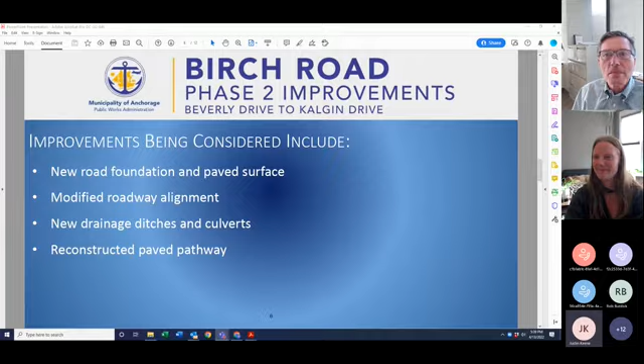So at this point, I'm going to pass it off to Justin. Oh no, I'm going to pass it off to Brian. Sorry about that, Brian's next. Thank you, I knew what you meant.

I am Brian Heffler, and for those of you who may have just joined a little bit late, I am the chair of the Mountain Park Robin Hill Rural Road Service Area Board of Supervisors. I'm going to share my screen here right now. Hopefully you can see that. I have a little presentation put together with the background and context, as Holly mentioned a minute ago. We are a 5-member board.

I myself have been on the board for over 25 years. I'm not even sure how long, but it's been quite a while that I've been involved with the board. The other members are Eric Emerton, who is on the phone this evening, Colin Leary, who may be on the phone (he was traveling), and Tom Bassler. We do have one vacancy right now, but we do have a 5-member board.

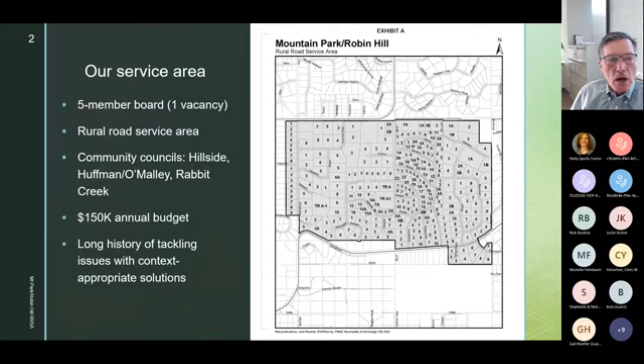A couple of things I'd like to point out. First of all, we are a rural road service area, not a limited road service area. The difference is a limited road service area is limited to maintenance only, while a rural road service area is able to do construction projects such as we're talking about here. So that's a really important distinction.

You can see Birch Road, right smack dab in the middle of our road service area. I suspect a lot of you have seen this figure before; that is what our service area looks like. We have about 7 miles of road. Interestingly, Birch Road itself splits us between the Hillside Community Council to the east, on the right, and the Huffman O'Malley Community Council to the west, on the left. We also have a little appendage below DeArmond Road, in the Rabbit Creek Community Council area. So we're really in 3 different community councils, but primarily for this particular project it would be Hillside and Huffman O'Malley. Our annual budget is about $150,000.

I might point out as well that we are also an aspect of the Municipality of Anchorage. Everybody on the board is an elected official. If you voted in the election last week, you may have seen Colin Leary was up for election again, and he was voted in as a road board member. We are sworn in, and we are officials of the Municipality of Anchorage. We're like the assembly in that we're politicians who are voted in, but we're also a little bit like the administration in that we have operational responsibilities administering our $150,000 budget to provide services in our area. So we're a bit of a hybrid between those two functions.

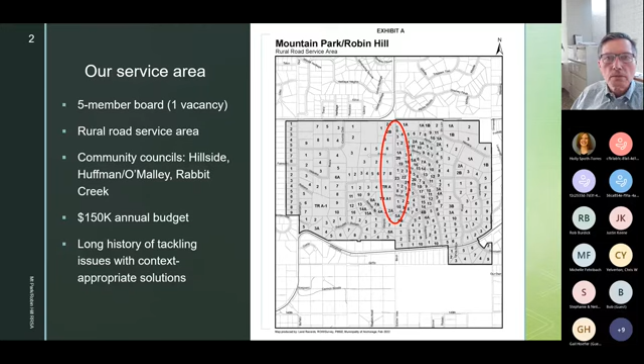We do have a long history here of working on these issues. I mentioned I've been involved for over 25 years, and we look for what I coined as context-appropriate solutions for the sort of things we have to deal with. As everybody knows from this time of year, there's a lot of potholing and runoff all over the place, and it's a real challenge with our roads trying to deal with everything we have going on right now.

So, Birch Road. This is what we're coining the current project, the Phase 2 improvements. You may recall, if you've been around for a while, we did Phase 1 improvements a number of years ago on the northern section. I don't have a perfect picture of it here, but I do have a cover page from the bid specs from back then, June 2012, when we went to construction. That was from Huffman Road on the north down to Beverly Drive, or really kind of Penny Circle right there, about 1,200 feet of roadway that we reconstructed at that point.

It was a long process from when we began planning to when we had shovels in the dirt starting construction. We began in 2005, and construction began in 2012, dribbling over into 2013. It was a pretty big undertaking on our behalf. The total cost, to my shock, was about $1 million.

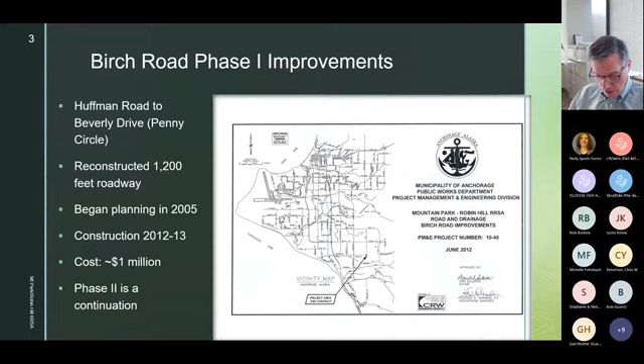There were all kinds of issues we had to deal with that we were finding out about as we went through the studies, and the engineering team helped us work through the design challenges. I recall one of our former board members driving down that road after it was done, and he said, 'Man, this feels like a million dollars.' And sure enough, for good reason, it was a million dollars.

Phase 2 is what we view as a continuation of the phase 1 work. There you see it, and we'll have a better close-up of this figure later on when Justin from CRW does his discussion.

You can see the big picture: Beverly Drive on the north, down to Kalgin, Naknek on the south, along Birch Road. The red line is just a box to show you where the project is—that doesn't mean anything more than that. The black lines are the property lines, and you can see how the road kind of meanders back and forth a little bit. Justin will talk about this more, but we don't always stay perfectly in the right of way, although we're not too bad, as you can see from that figure.

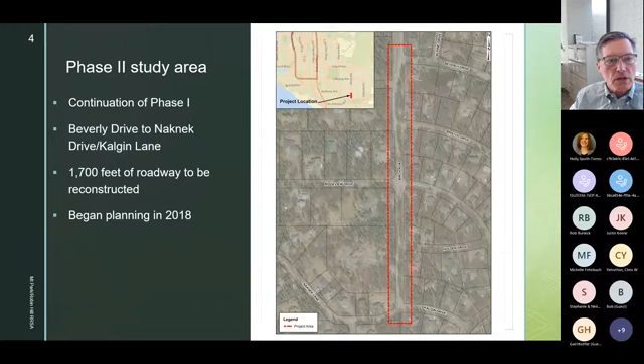So this is a continuation of phase 1, down to Naknek, Kalgin, about 1,700 feet of roadway—something like 40% longer than the phase 1 improvements. We began scratching our heads and thinking about this back in 2018, knowing one of these days we'd need to take a close look at how to fix the lower part of Birch Road.

So what was the purpose and need as we looked at that section of road—what did we want to accomplish, or what needed to be accomplished? Better road conditions and traffic flow. We get a lot of complaints about that section of road; it's difficult to navigate, it's hard on your vehicles, there's a lot of wear and tear, and generally it needs improving for driving through that section.

Driving safety is a huge part of that—sight distances, passing lanes, and the like, just having a safer drive through there. Interestingly, we don't get too many recorded accidents there because I think everybody really has to slow down as they're going through. There have been a couple reported over the years that I'm aware of, but making it a safer drive through there is important.

Emergency vehicle access matters too. Unfortunately, and really tragically, we had a house fire over in my neck of the woods last fall—the roads are in a little better condition over there. At one point, ten different fire trucks and other emergency vehicles responded to that house fire. If that had been on Birch Road, I don't know what they would have done, because it's almost impassable for big vehicles like that, let alone having them stacked up and able to respond to a fire in that area. I worry about that, and about having better access for fire trucks, ambulances, and the like.

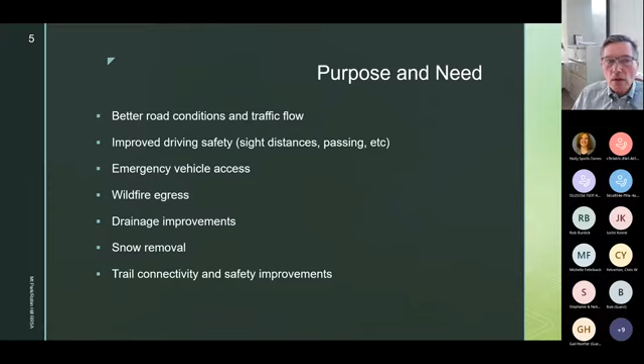And then really last but certainly not least is trail connectivity and safety improvements for the trail. The bike trail along there is worn out really, it's not in the best of shape. The road crossings are really suboptimal. And while we're working on the road, we should be able to work on the trail as well. So that was when we were coming up with a list of what we really wanted to accomplish in here. That was what we came up with.

So what have we done so far? If we've been working on this since 2018, what have we done? The first thing we did was a little drainage evaluation in the low spot.

We thought, well, why don't we have a little bit of money for an engineering study, why don't we take a look at that low point and try and figure out what we can do with the water down there. Turns out when we started looking into that issue, CRW was our engineering firm at that time. Actually, they have been all the way through. And we really quickly realized that we needed a more holistic approach on Birch Road from where the phase 1 improvements ended at Beverly all the way down to Naknek, and look at a corridor rather than just a little block section of Birch Road.

It really had to all tie together, due to, you saw earlier how the road just kind of meanders and so forth. How are we going to design that all together?

So we commissioned a so-called design study memorandum. You can see that was completed, at least as a draft, in June of 2020. For those of us who aren't in the business, I call this 35% design. That's how I think of it, is doing that initial work to look at that whole corridor, look at options, look at what the big design challenges really are. And that was what CRW did in that particular study.

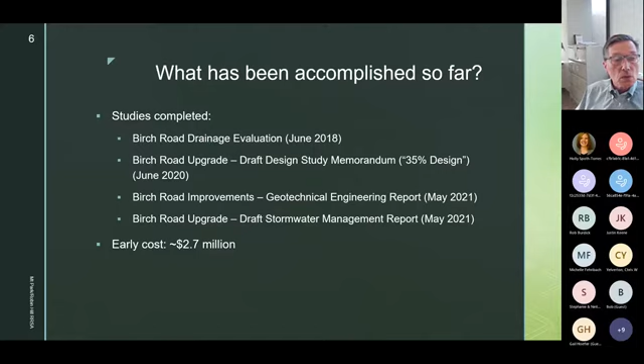The early cost we came up with was about $2.7 million. Again, a little bit of a shocker. It's like, how is that possible for 1,700 feet of road to be on that order of magnitude? And I really kind of questioned that cost and dug into it.

So what again, me as a layman, the road board guy, what I really came up with is the big drivers on the cost. First of all, the road is not constructed to modern standards. The lane width isn't proper. You can hardly even pass in the winter time down there in some sections of Birch. Sight distances, you really can't see very well.

The ditching isn't right, et cetera. Interestingly enough, as we dove into this, one of the things we realized is that our choices really are, and it may not be quite this black and white, but I'll portray it that way: either do nothing or build a modern road to current standards as required by the municipality. There's really not any gradations in between. So either we do it all or we do nothing is the impression I've been left with.

From the municipality of Anchorage, is there a little bit of wiggle room on the do-everything end of it? Yeah, there probably is, but what we need to do is make our case, like if we can't quite get the right ditching along this section of road, what kind of variance can we get. But the onus is on us to prove that we can't do it.

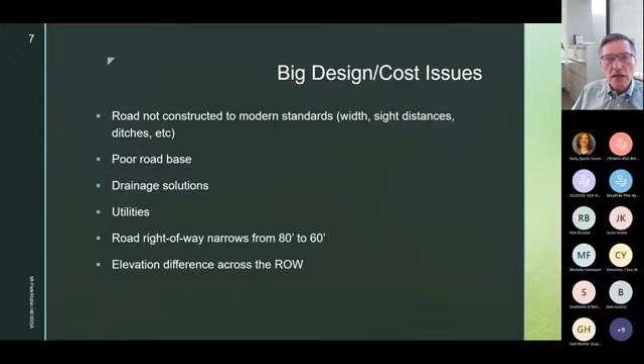The last thing on this list is elevation difference across the right of way. What I mean is we have to tie in all the roads—Bristol, Ridgeview, Holden, and so forth—and all the driveways up and down there into Birch Road. That is a driver of cost because it determines where we can put the elevation of the road. So lots of big issues to be dealt with.

Rob mentioned earlier, he's the design guy, so he's digging into all these details with the team there at CRW, trying to come up with a good solution for all of these things.

So, way forward, here we are today. We wanted to reach out—we thought it was a good time to talk to people and bring them up to speed on what we have so far. We are advancing from the 35% level up to the 65% design. We're working through all these issues, refining the cost estimate, and trying to come up with solutions to all of those various things we need to do.

Once we've worked through those issues and have a plan, we hope to come back out for another session like this, talk to people, get it out on the website, and let people noodle on it, think about it, and give us feedback on all those things. The next phase after 65% is to get to 95%, which is really preparing for construction and getting close on all the bid specs. We do need to seek construction funding—that is not part of what CRW is doing.

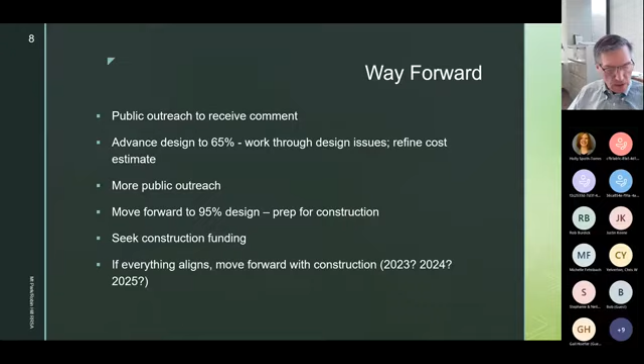We're looking for construction funding. In parallel, if everything aligns and we get through all the design issues and find the funding, I can't really rule out construction in 2023, although that seems highly unlikely. More likely it would be 2024 or 2025 before we could get to construction. All that remains to be seen based on what we still need to do.

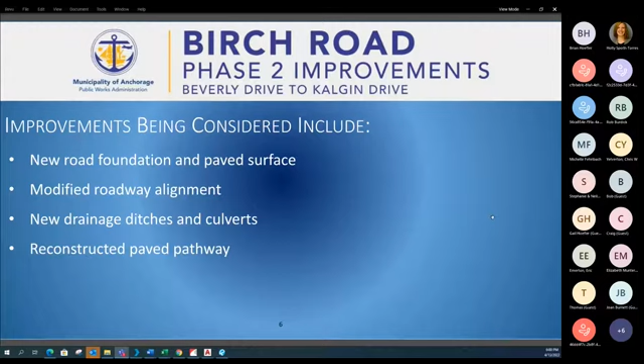The improvements being considered to meet the goals of the project include a new road foundation and paved surface. The next item is a modified roadway alignment. The existing roadway is not well situated all along the corridor, so the modified alignment would help us better utilize the existing right-of-way and trail and walkway easement. This is the big one: new drainage ditches and culverts, and a reconstructed paved pathway.

On to the next slide. This is an overall view of the entire corridor, and I'm going to zoom in a little bit. As Brian noted, we've been working on this for quite some time. An additional item we've completed is a full topographic survey and right-of-way survey.

What's being shown here is a detailed topographic base map and right-of-way base map. As Holly mentioned, we'll be posting this presentation online so you'll be able to take a look at it in more detail. Don't feel overwhelmed as I go through this quickly - you'll have the ability at your own time to check this out in more detail, zoom in, look at these features, and ask us questions later.

We also have, off to the right, an existing legend that spells out all the existing features shown here. The project, as Brian noted, is going to start south of Beverly Drive. This is where the last phase of the project, the construction, stopped near Beverly Drive - we installed this existing cross culvert.

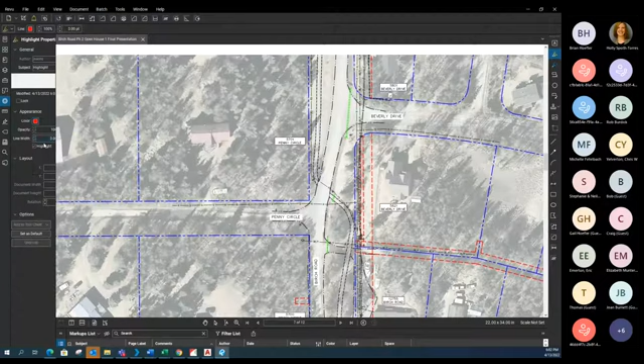I'm going to pull up a markup tool here and highlight a couple things as we go. This green dash line is the existing culvert. These circled dash lines are the existing gravel edge of roadway.

We've got the existing paved pathway here. Like Brian was saying, there are all sorts of utilities: underground fiber optic, underground gas, overhead electric and telephone, and underground cable. As part of our survey effort, we've mapped all these features, so we have a good idea of what we're up against for designing these improvements.

The blue line is the property line and right-of-way lines. The red dash lines are the existing easements. That's a summary of some of the existing features - I probably didn't go over all of them, but we'll move along from north to south now.

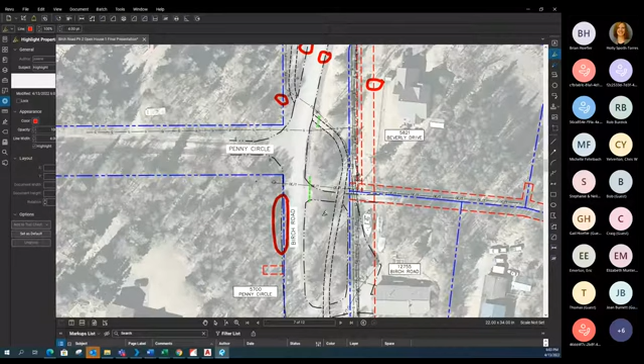As Brian noted, Birch Road does meander. In this case it actually meanders just over the right-of-way, onto private property. So this is a place where we'll have to shift the roadway so our improvements are ideally not on private property. The pathway, as many of you know, crosses here from the west side of the roadway to the east side, and follows the east side all the way down to Kalgin Drive.

Proceeding along, we have 80 feet of right-of-way in this section of the project. Just to review what the right-of-way means: it's owned, maintained, and operated by the Municipality of Anchorage. In this case, it's maintained by the RRSA, but this would be where the MOA is able to improve that area. Of course, where people's individual parcels are, those are owned by the individual owners.

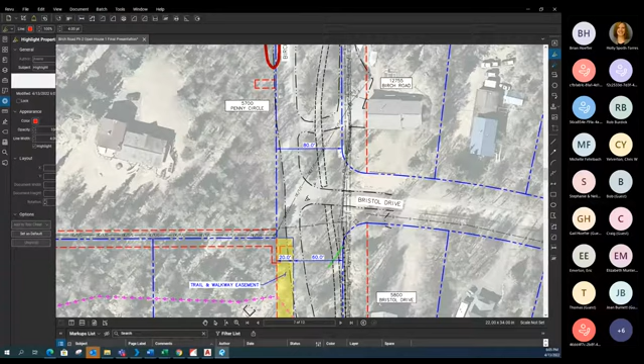At Bristol Drive, you can see how far the existing pathway crosses from the edge of the roadway. Current design standards actually want that crossing to occur closer to where people are going to be stopping on the side street. So this would be a situation where we'd want to improve that crossing location so there's not an issue with a vehicle potentially conflicting with a pedestrian or biker utilizing that pathway.

South of Bristol Drive is where the right-of-way is reduced down to 60 feet, but on the west side of the roadway there's a 20-foot wide trail and walkway easement. That continues almost to the length of the project, but not quite—we'll look at that further south. It's unique that we've got 80 feet of right-of-way to the north, and then it reduces down to 60, but there's this trail and walkway easement.

Well, the trail and the pathway is actually not installed there. So in this case, the road's actually in the trail and walkway easement, but the actual pathway is on the other side of the road. So it's not the best use of the existing right-of-way and trail and walkway easement.

Now, between Bristol Drive and Ridgeview Drive is where we have one of the biggest challenges on the project. That's because, as many of you probably know driving out there, there's a low point within this section of Birch Road. Drainage flows from Bristol Drive to the south, and Ridgeview Drive drainage flows to the north. It gets to a point about here, the north side of this parcel's driveway, where it accumulates in the road and ends up ponding really bad, creating a lot of potholes and distress and degradation of that roadway surface.

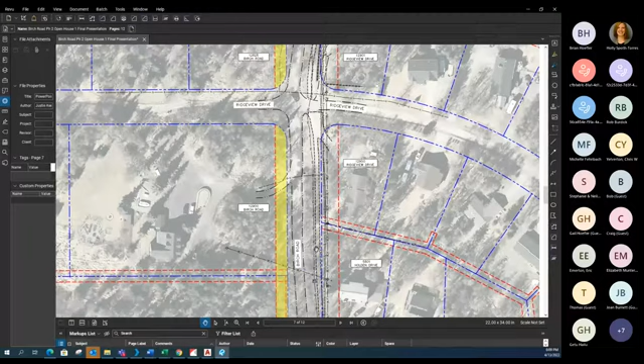Moving along to the south, we've got another side street, the Ridgeview intersection, and you can see again that the existing pathway doesn't cross at an ideal location. We still have that 20-foot trail and walkway easement on the west side of the road, and we still have 60 feet of right-of-way. You can see this fiber optic line—it's still sort of smack dab in the right-of-way next to the trail. So we know we're going to have to deal with that, and that's one of the drivers of the utility relocation costs.

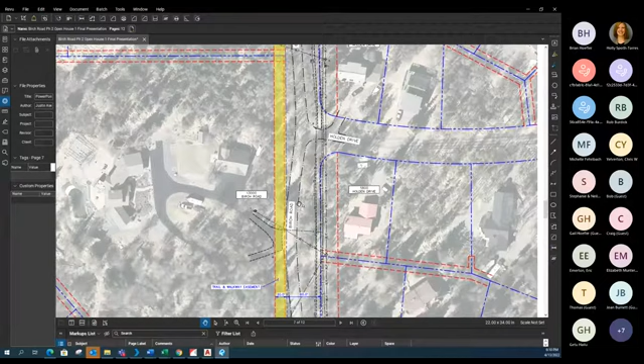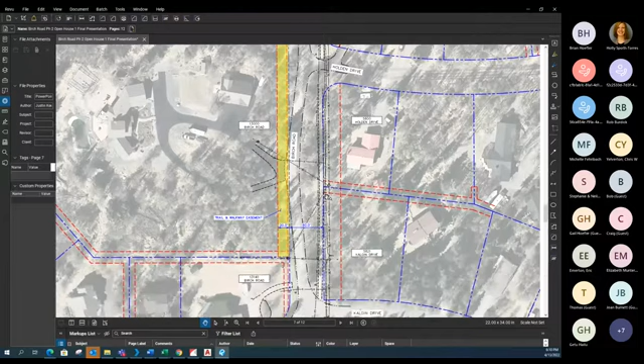Further south, Birch Road is still kind of meandering back and forth within the right-of-way. We've got Holden Drive, another T intersection here. A little portion of Birch Road does spill back onto private property into that existing easement right here.

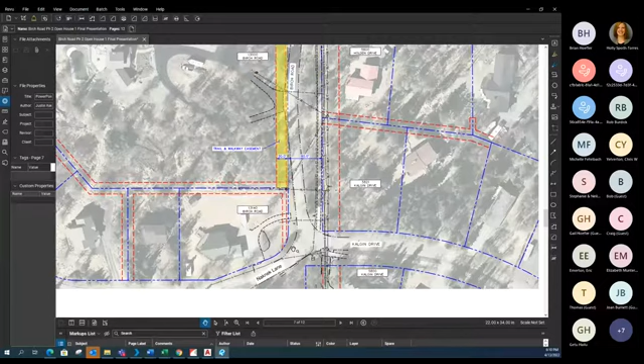So that's sort of the existing conditions in a nutshell. And again, this will be available online to sort of investigate in further detail.

And what I'll do is just kind of walk through these elements. It's probably going to be a little bit overwhelming, but you'll be able to view it at a later date as well. If you have any questions, please reach out to us.

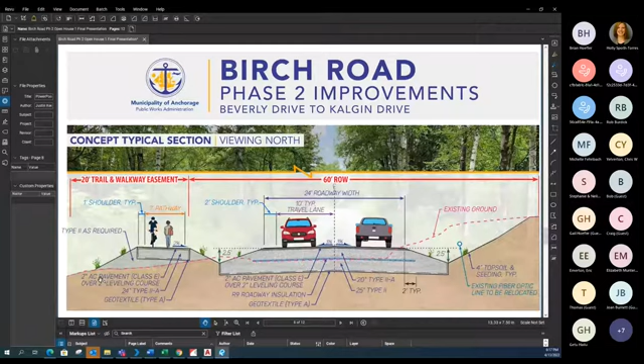We're also looking at putting in just a little shoulder, a 1-foot shoulder on either side of the pathway, just to give a little clear area. And then the goal is to get our improvements to be within this overall section of 20-foot trail and walkway easement and 60-foot right-of-way. So that kind of summarizes the conceptual typical section that we're evaluating to use on this project.

Let's talk a little bit more about design concepts and features. The big one, just to reiterate, is we still are in a conceptual level, but we are pursuing relocating that pathway from the east side to the west side of the roadway.

The low point between Ridgeview Drive and Bristol Drive is, like I was saying, the crux of the entire project, and it really is going to come down to trying to make an improvement that is not going to be completely perfect, but is going to provide a great improvement of what's out there right now. We drilled into 2 options, and option 1, which we consider the preferred option, is to

install infiltration trenches or a below ground chamber system to allow drainage to infiltrate into the subgrade. We got those results from the geotech report that did provide some good draining soils below grade. And now we need to work out the details of what that's exactly going to look like, as well as make sure that what we propose is economically feasible to construct.

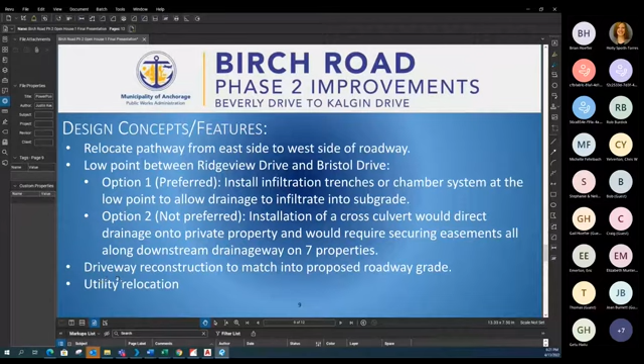The last one, which we've kind of already touched on, is the utility relocation. As part of our 65% design, we'll be putting together a utility conflict report, which basically lays out all the utilities that we think will need to be relocated, modified, or adjusted. And we'll put cost to those such that that cost can be factored into the overall total project cost.

So just to go over the timeline again, I know Brian went over it a little bit, but to bring you up to speed with what we've done and where we want to go, we've completed some preliminary engineering and surveying. We are here at open house number 1, and we thank everybody for attending tonight. We'd like to get through the 65% design probably near the end of summer here in 2022.

We'd like to regroup with the public to present the 65% design at open house number 2, which will be in fall 2022. We'll make sure everybody's aware of those dates so they can plan accordingly if they'd like to attend. We'll then advance to 95% design after getting review comments from the MOA and the RRSA and making changes to the 65% design. At that point, we'll be very close to finalizing the design, but we haven't got funding yet for the final design and to send the project out to bid and construction.

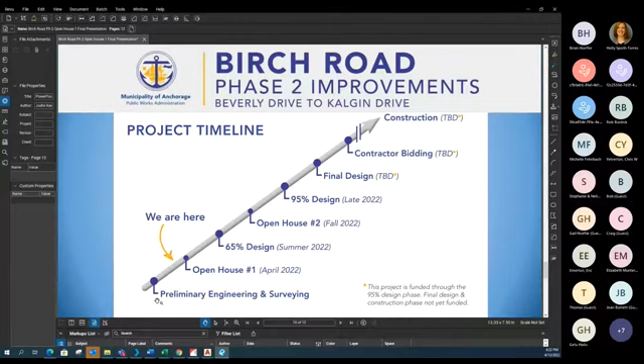Those items will still be needing funding, and those dates will be determined as that funding comes into place.

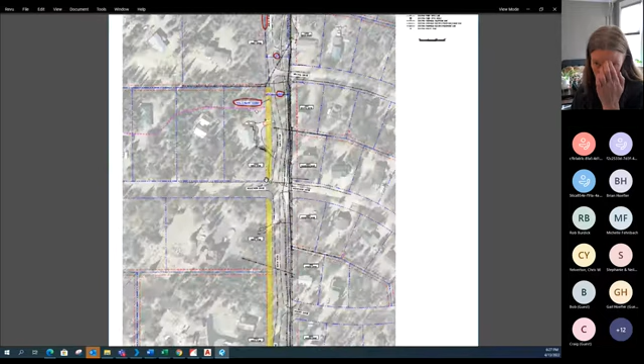This is Kim Smith, we got the computer and the phone going. So our question was about the ditches and culverts that you guys are talking about. I live off Ridgeview - are they talking about ditches along the side streets, or just on Birch Road?

Great question. On this project, we are focusing on Birch Road. However, we understand that when we put ditches in or cross culverts at the side street, like for example on Ridgeview Drive, we may need to do some additional improvements on the side streets to make sure if we're sending drainage down a side street, we need to accommodate what's going to happen.

Where do you live on Ridgeview Drive? Do you live on the portion near Birch Road? We're two houses up from Birch Road. Okay, two houses. So I'm just wondering, I don't care, I hope they do fix this, and I'm excited that the planning is going on. I'm just curious to know how far up each of the side streets they're going to have to do something, I would assume.

Exactly, that's right. We don't know the extents right now, but we will have to do something to tie into the side streets, both with the roadway design and with the ditch design. Okay, thanks. Thank you very much.

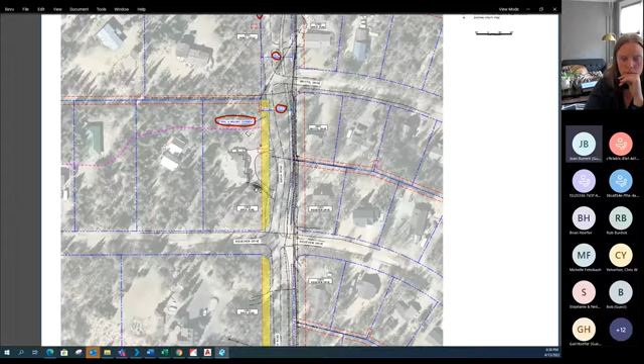Four years I've been here, I've been driving Birch, the worst part of it that we're discussing. And what I see is that it's getting worse every single year. My concern, I'm hearing our options are to do everything or do nothing. And I don't see how that little section of road will even be there in another three years, if that's what it takes to get this project put together.

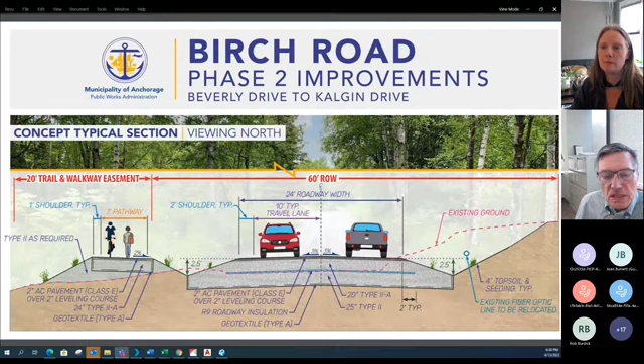Is there absolutely nothing that can be done in the interim, something as a stopgap measure just to hold that surface, that awful surface that we at least have, anything that can be done to hold it in place long enough to get to the ultimate solution.

Justin, I'll go to you first, and if you want Brian, I'll go to Brian first. Go ahead, Brian. Yes, Joan, so that section of Birch, you may recall from the comments I gave earlier, that was the first thing we looked at, how can we do something with the drainage in that particular section? Everything ties together, and it's really hard to just isolate one little section and work on it without a broader solution that is both north of there and south of there. So that was why we went to the more comprehensive corridor study a couple of years ago, to look at the whole corridor through there.

Honestly, what would we do? We thought a lot about this. I've lived in the neighborhood for many years. Kim Smith was just making a few comments, she's been in the neighborhood for many years, many others. We've all been thinking about this issue for twenty-plus years, and we have yet to come up with a good solution because there's nowhere to put the water. So we could raise the road bed, but all that's going to do is cause more ponding along the edges. There won't be anywhere to move the snow. It doesn't have a good, slick, easy solution.

The interim solution really is to do more grading. In fact, I think even this week we were going to try and get the road graders out there to grade out those potholes and improve that little section. But until you can fix the drainage, you can't fix the potholes. And the problem is we have nowhere to put the water. So, I mean, that really is it in a nutshell. Thanks, Brian.

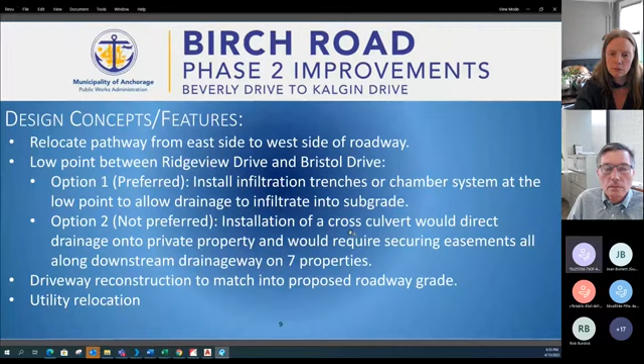I agree the water issue has to be addressed, but are we creating another safety issue by doing this? And like you say, it's all or nothing, and I guess that's not a lot of choice.

My other concern is the 2.7 million sounds like a lot, but I have a feeling it's probably far greater than that at this point. I appreciate it, and hopefully the next meeting can be in person. Thank you.

Thank you for those comments, Nancy. By way of my background, I've been in the neighborhood for 30 years and have seen a lot of those improvements you've talked about. Predating me in the neighborhood, I've heard all kinds of horror stories about how the roads really were impassable this time of year, and we've come a long way in terms of making the roads more passable.

The biggest drawback in my mind is the speeding issue, and this comes up time and time again. People I've talked to who are not in favor of moving forward with a project like this usually cite speeding as their number one reason. There's no ideal solution - either we fix the road or we don't.

As the old saying goes, what's the opposite of a speed bump? Well, it's a pothole. So the potholes really do a good job of slowing everybody down, as you point out. Looking at potential traffic calming measures is something I think we want to consider as we go through this process. We haven't really dug into that issue yet, but it's in the back of my mind, and your comment is well taken that a better road just speeds everybody up.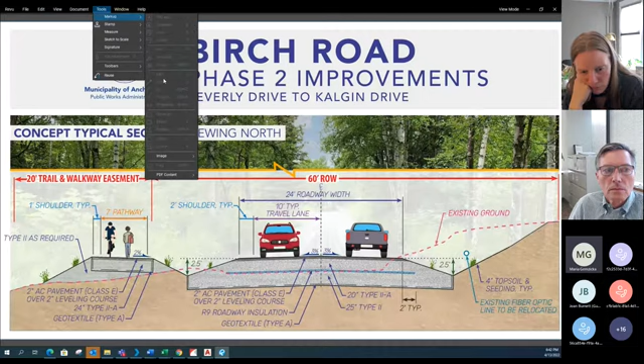Yep. You draw the new pathway which goes west of Birch. And between the pathway and the road, there's a 2.5 foot ditch. So if you first made that pathway with the ditch — and this road where there's the red and gray car — normally the road is higher in the middle and slopes down to the sides so the water runs down. But we don't have an eastern ditch right now because there's a hill, existing ground, so there's no such ditch. The water cannot go there.

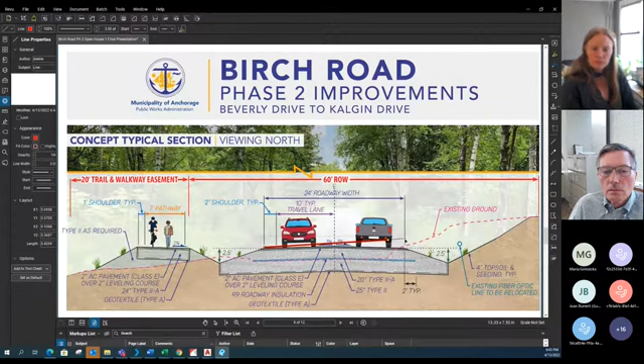So what if we made the western ditch, and the road sloped the whole way from east to west, so it would slope toward the ditch? I got you now. Yes, like that. Yes, that's my point. So if you need to resolve this, then this would take the water away from the road. Maybe we'd have a little fewer potholes there. Would that be doable?

I mean, I think it's definitely worth considering. I see what you're saying now — instead of doing a traditional crown on the roadway with ditches on both sides, you just slope everything to one side, and the ditch could be on just the west side, between the pathway and the roadway.

I don't mean like definitely this permanently — this is just a temporary solution. I understand that you need to do everything you plan. I just meant that if we're going to wait another 2 years or however long for all these road repairs, what if we did this ditch and that little slope, and that would kind of help us for those 2 years until we wait, so we could have a usable road, and you wouldn't have to grade it so often, because it doesn't last almost anything — after each rain there are new potholes. So maybe it could even be cheaper for you.

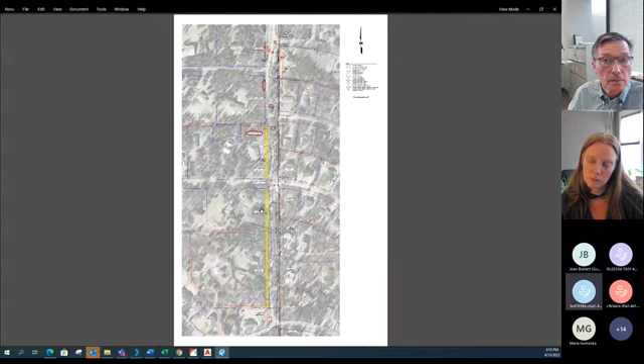Well, with this, nothing at this point is for sure. It's not. But realistically, we lose 20 feet of right of way south of Bristol Drive. So to take advantage of that, there's not enough room in the 60 feet left to fit in both the road and the trail. So realistically, we need to take advantage of that 20-foot trail right of way to fit everything together and to have continuity from north to south all the way down Birch Road. So we haven't come up with any other solution at this point. Will we continue to look at it? Sure, we will. But at this point, that seems like the best option to move forward if we want to do anything.

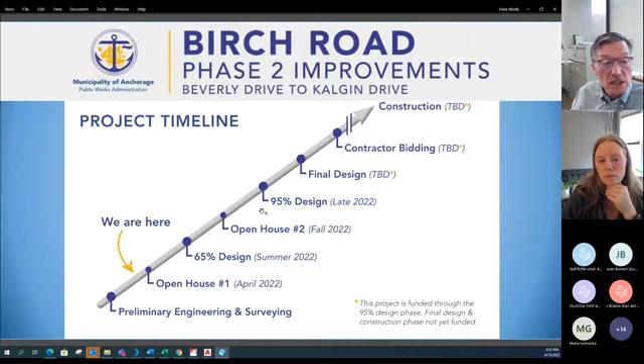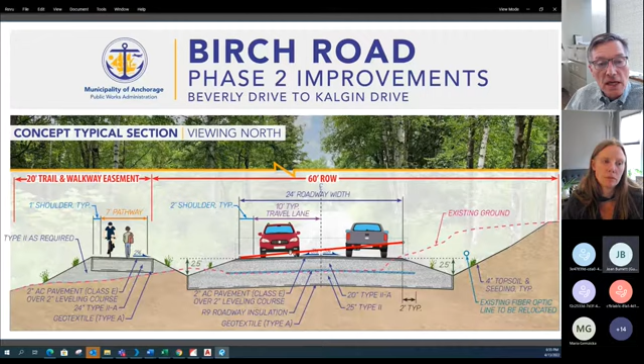Okay, and you'll be posting what that'll look like shortly? Right. At this point, I don't know if you were able to see the video, but Justin had a nice diagram of all of the different features that exist today along this right of way. We don't have a road designed and on that diagram yet. We're working on that - that is what we're trying to get to in moving from 35% to 65% design. But Justin's diagram shows a lot of those features that we're trying to deal with, including the 20-foot trail easement along that section of road. So if you haven't been able to see the figures here online tonight, they'll be posted to the website and you can take a look whenever you have a chance, and they'll be up there, I think, for the long haul, and you'll be welcome to look at them.

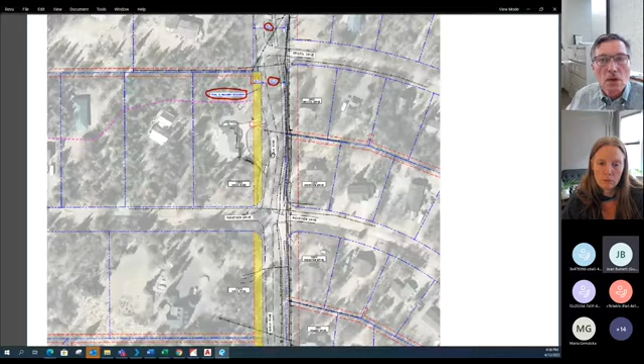Okay, yes, because our fence runs parallel to the pathway, and so our concern is that the road will be just a few feet from our fence if that happens.

So I guess we'll get a look at the photos when we can, since I wasn't able to log on with Microsoft. Everyone who we have an email for will receive an email likely tomorrow, not tonight, letting you know when the website has been updated with these materials. Maria, like Brian said, you're getting a picture of existing conditions right now, and in the fall there'll be an opportunity to see a more detailed picture of the proposal.